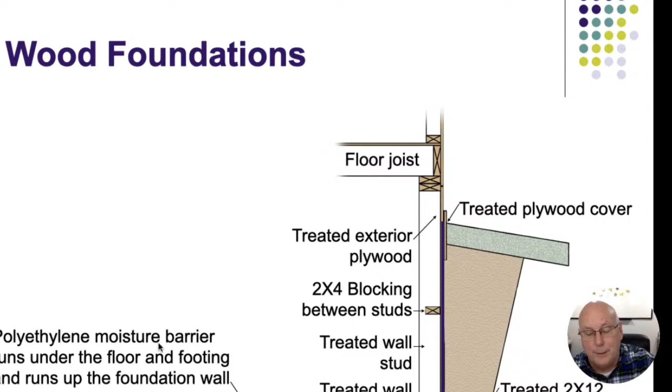All right. Cinder block, concrete masonry units. We kind of use those terms interchangeably. Really, the only difference is the aggregate that gets mixed into, we'll call it concrete, for lack of a better term. It's just the aggregate that's in there. So if we use cinders, then it's a cinder block. If we use concrete, then it's a concrete masonry unit. But they're both basically the same thing.

They're a figure eight shape. The holes should be going up and down, and we should be filling those openings up with concrete to make them solid. I know above grade it doesn't happen very often, and I don't have any way to check it if it does. We did have CMUs underneath our porch up in the front, and they were not filled with concrete when we did our remodel here, so we ended up mixing concrete, pouring it in there, putting our anchor bolts on, and we made it one solid concrete wall.

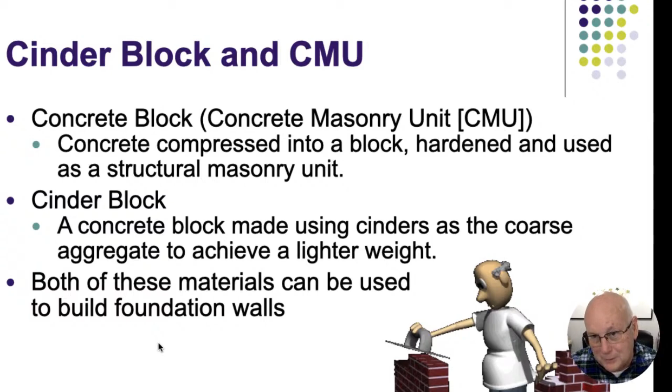I would like you to know the term CMU, that stands for concrete masonry unit, and then cinder blocks, I think, is more of a common term. Nobody really puts cinders in the aggregate of the mix anymore to make the CMUs. All right.

We need to be able to capture the lower footing as well and let that water go into a sump pit, collect it, and pump it away from the house. This goes around the entire perimeter, and when that happens, it looks like a bench. And that's how it got its name of a bench footing. All right. Two more terms that we're going to be using for foundations.

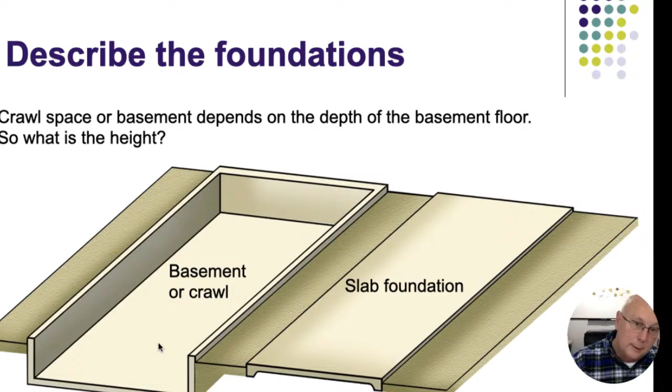Now, I get it. I could probably stand in some areas that you put Michael Jordan or some other extremely tall person in there, and they're not going to be able to walk straight up and down like I can. Or even on the other side, we get somebody who's shorter, and they may be able to walk in areas that I can't walk in. Nonetheless, I don't think it's the end of the world if you call something a basement or a crawl space.

So getting into the slabs, we do have 3 different types of slabs that you're supposed to be aware of. I'm going to hit all 3 of these, and then I'll come back to this one. So the first one is a floating slab, and then we have a supported slab, but this is a 2-pour slab. And then we also have a supported slab, but this is a 1-pour slab. Single pour slabs are called monolithic, and when we're in areas where slab construction is popular, this is probably the one that we're going to end up seeing. So let's go to the first slab.

Sidewalks, driveways, anything that's floating on the earth, they're usually going to be above the frost line when that happens. They're subject to settlement or heaving if water gets underneath it. In buildings, in houses, our garage floors are typically going to be floating slabs. So our footings, and I'm talking about attached garages, forgive me, not detached garages. So attached garages, we're going to build our footings going all the way around, and then inside there we're going to put a floating slab in there as well. All right.

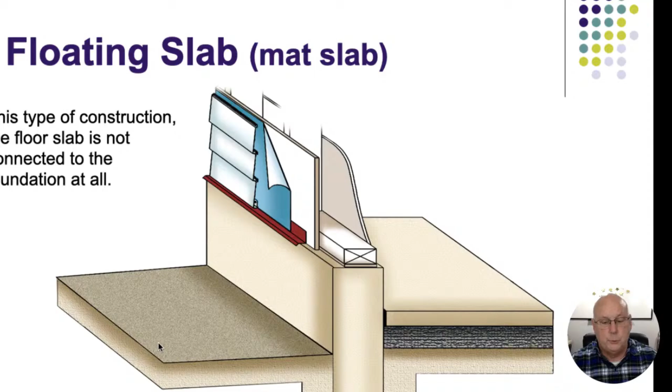Supported slabs, even though on this one we're showing that it's on top of the foundation, we do have areas where this is pretty common actually. I know the Chicago Housing Authority builds all their construction this way. So on the outside what we're going to see is a cold joint, so that's going to be the top of the foundation here, and then we'll see the slab poured on top of it. It's not a defect, it just is what it is.

The problem with that is the area in the middle is still floating. Hopefully there's going to be enough stone and undisturbed soils, but that's not always the case, because this was dug out, especially in this area here, because they have to make an overdig, and it was put back in there. Usually you get settlement or sinkholes, for lack of a better word, underneath the slabs. And I've literally seen where these slabs have come down and you actually see them start to bend and they drop down and go back up on the other end. It's pretty amazing how much the earth can move.

We have a few areas in the city of Chicago. It just so happens one of the highest, most sought after, most expensive areas is Lincoln Park, and this is no way of me trying to diminish the property values there, but there are a lot of settlement issues. But with everything, settlement issues can be fixed. They could do mud jacking, they could do other items to solidify the ground or the earth that's underneath those slabs so that they don't settle.

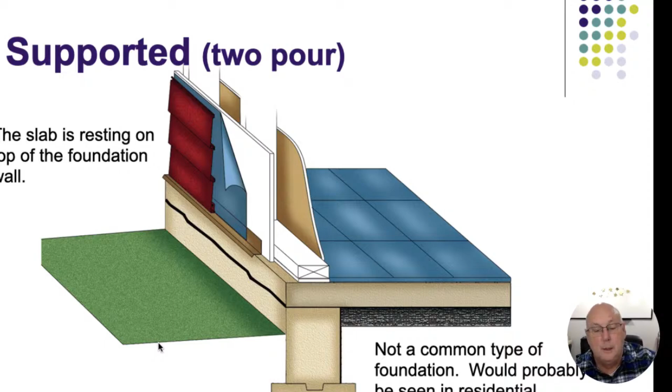All right. Single pour or monolithic pours, these are common in detached garages. I visited my son down in Memphis, Tennessee, and down there they really don't have any basements at all. Everything's built on a slab. I think that's because they have a lot of bedrock that's pretty high, and you just can't dig through the bedrock. And that's a guess.

I'm sure there are some areas that have basements, but most of the new construction I saw down there was a monolithic pour. So here, when they run the plumbing and everything else, they have to put all the plumbing, heating ducts, anything that they're going to run underground, they have to get all those items in there first, and then they go ahead and pour the slab.

Now the bottoms of these footings here, the monolithic pour, this does need to be on undisturbed earth, so we can't fill it back in with stones or rock or anything else to raise it up. It needs to be straight clay or whatever the earth is going to be in here. The middle can be filled with stones and rocks, and typically there's going to be steel that's mixed in here so that the concrete stays together.

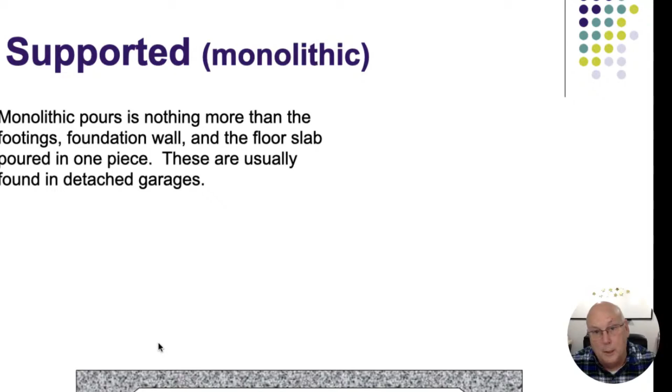All right. Monolithic pour, very common in detached garages in our area that we're going to end up seeing. Basement lowering or the bench footing, we saw that already. All right. A few more words. Bowing, bulging, leaning. You are expected to know these terms. You will be tested on them, and we should really be using them properly.

Bowing, if you see it, that's going to be the horizontal movement. So if something is bowing, it's being pushed inwards or outwards. Bulging, think of that kneecap thing again. So bulging is a vertical displacement. So if we get the knee that's pushing in here with the bulging, that's when we're going to use that term.

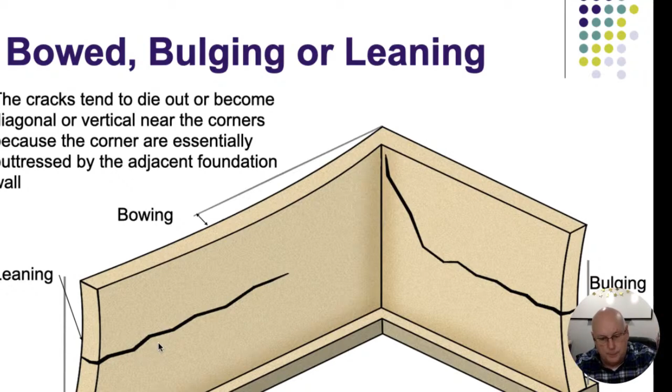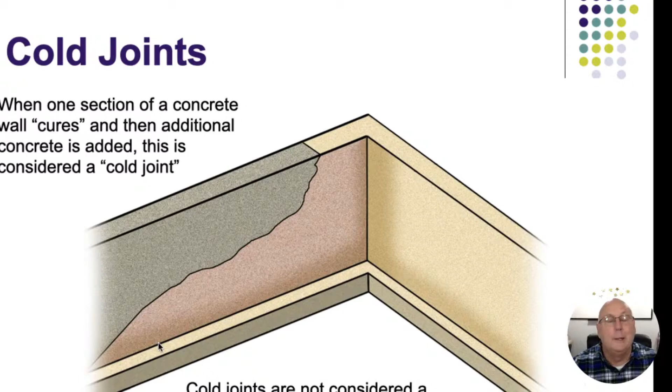Cold joints, anytime you have concrete that has cured or dried or become hard, and then we pour more concrete on top of that, that's a cold joint, and you'll see definitive lines in there. They're not going to be a crack or anything else. When you start seeing shadows in the concrete, I don't think they call it a warm joint, but that's where two different pours came in there, but yet the first pour didn't cure yet. All right, but cold joints, one is already cured.

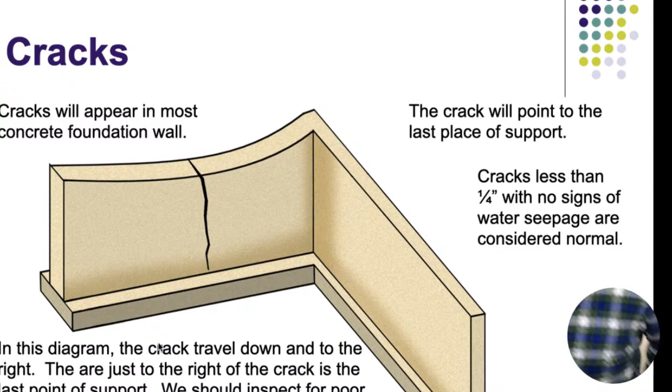So reading cracks is a big deal here, and I am going to step up just for a second, and then I want to switch cameras here.

So let's talk about reading cracks. This is probably going to be one of the more important things that our clients are going to be worried about when they end up seeing cracks in their basement floors, and what's serious and what isn't serious. All right. Now, you can always pawn this off on a structural engineer if you want to, but in all reality, a structural engineer is going to have the same handicap that you're going to have. The biggest problem with reading cracks or finding out how serious they are is knowing what we know, and more importantly, realizing what we don't know.

All right. So if a house is brand new and the foundation is like 2 months old, and I'm starting to see some cracks in that foundation that have happened already, I think we could start being a little more nervous about things. But if a house is, let's say, 50 or 70 years old, and we see cracks in the foundation, and pretty much everyone we're going to run into is going to have that, let's think about what we don't know, all right? Those cracks that happened, they may not have...

Our entire screen is showing. I'm sorry about that. Perimeter edges are cut off. Okay. Let's see if I could zoom out a little bit then. There we go. Hopefully that'll make things a little bit better, so you can see these things.